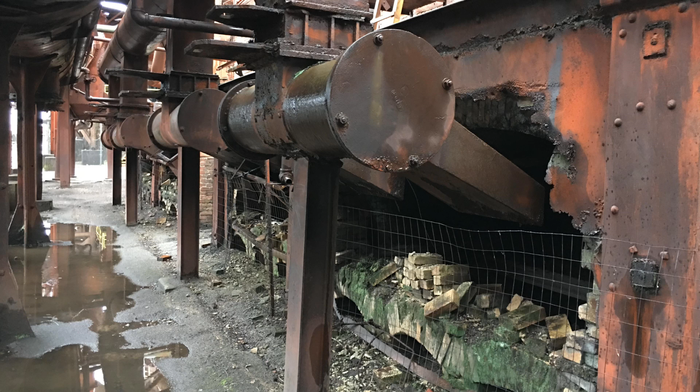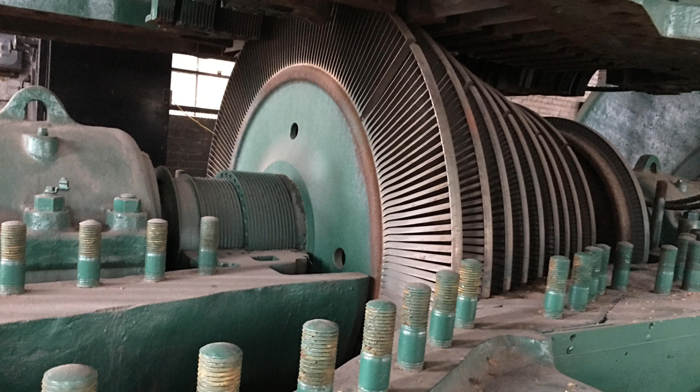I took a lot of pictures and video, trying to make a really nice video out of it. It's going to run a bit longer than normal, about 40 minutes or so, but it takes a while to get through that place, and there's some really cool stuff to see. They have the old steam engines, some late model Ingersoll Rand turbo blowers, and just about every place in there is fascinating to me. They also had the old stock tunnel, a real creepy place with water falling down and stuff. I really enjoyed it.

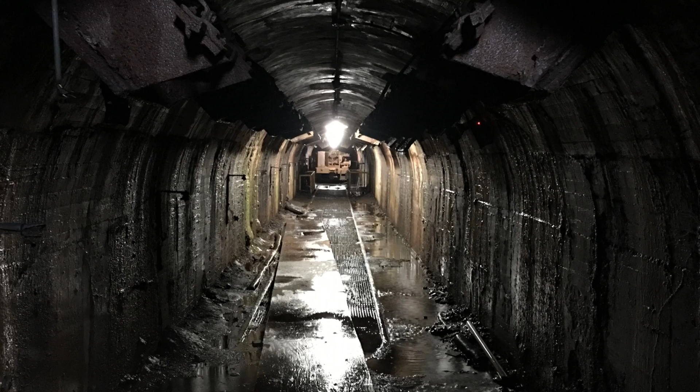I can't tell you how much I really enjoyed that. I was by myself this time, Abby wasn't able to go on this trip since she had other things going on. She really missed out, but we plan to go back and see it again when we're in Birmingham so Abby can check it out for herself.

So be on the lookout for that video, I'm really looking forward to sharing it with you.

For the machining content this week, I've got a big mix-up for you, a lot of different things going on. I'll show a little more of the G&E shaper, I replaced some screws on it and we did some more practice cuts. I've also got several different jobs from my day job at Motion, some different things we've been working on, some cylinder work, just a good mix.

I also do a follow-up on that very large gearbox I last showed on its side, with the big hollow bore gear and the vertical input shafts. My coworker Brett tries to explain what the gearbox is used for, since that's one of the things everybody's always interested in.

So that's going to be the extent of the content for this week, and I think I've got a good video for you.

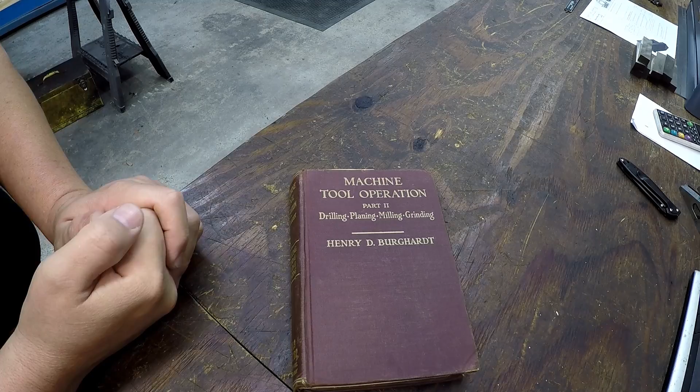I'm going to move the camera down and show you one of the reasons why he sent this book to me, because it has a section on shapers. Let me share that with you, and then we're going to jump over to our content this week. So here's our book from Arthur Nelson, let's check out what it's all about.

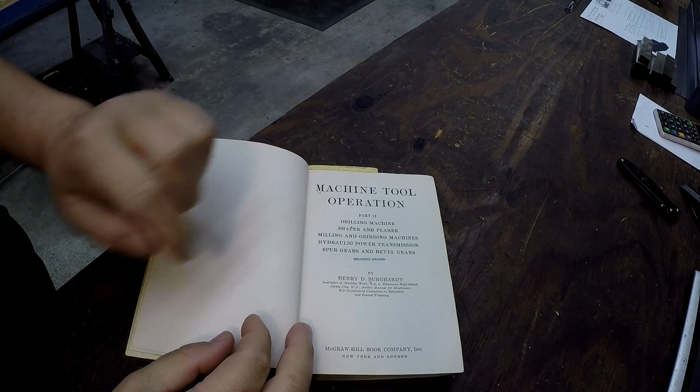Machine tool operation, part 2 - so obviously there's a part 1. We've got drilling machine, shaper, and planer, milling machine, grinding machine, hydraulic power transmission, spur gears, and bevel gears. Very cool, man.

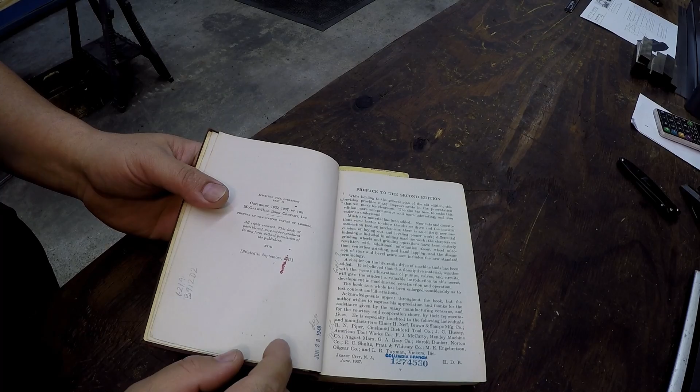This one says copyright 1922, 1937 by the McGraw-Hill Book Company, and this particular copy was printed in 1947. Lots of good stuff in this book - one of our favorite classic type books.

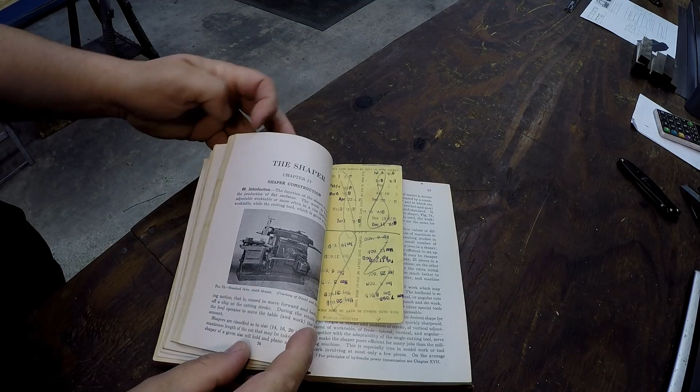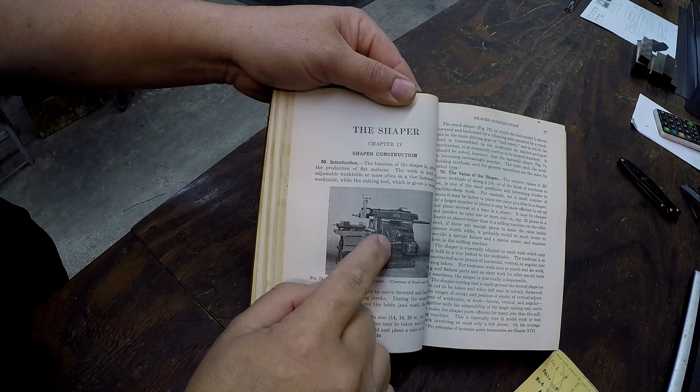We're going to go ahead and jump to the section on the shaper. Look at that - can you tell what kind of shaper that is? That's the same shaper that I have here. That's a G&E shaper, except this is your regular tool room style, the straight table. So a very good section in this book on the shaper and on the planer.

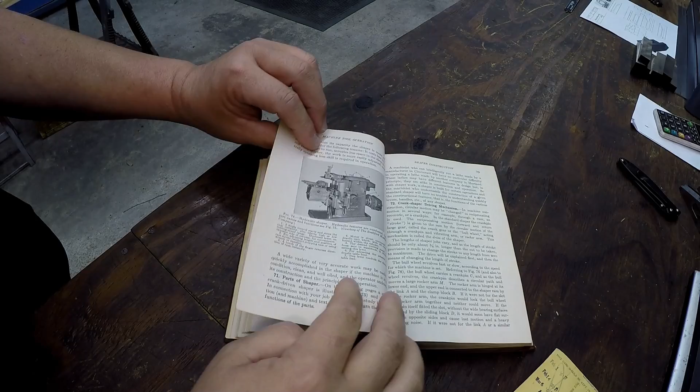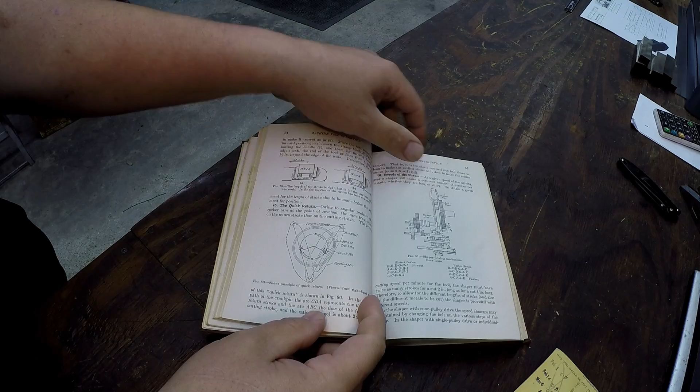It does have some other machinery they share in here as well, but it does a really good job of explaining how the shapers work. This is some of the stuff I've shared with you before - the crank, your rotation there on the crank and the bull gear. So a lot of good stuff.

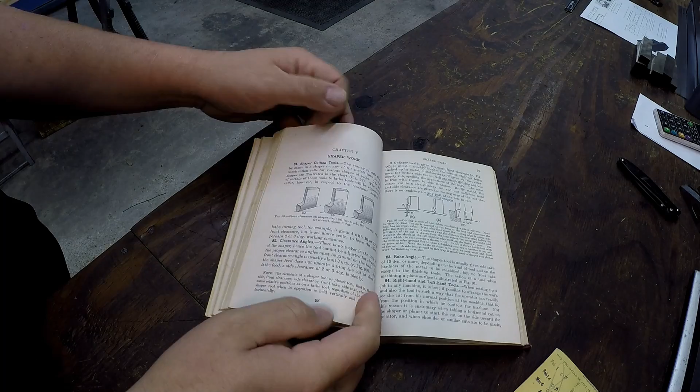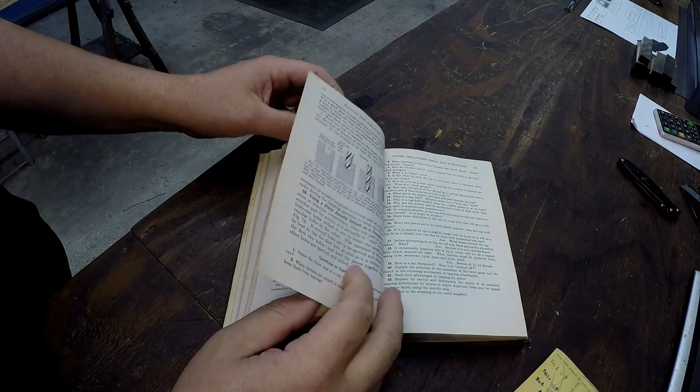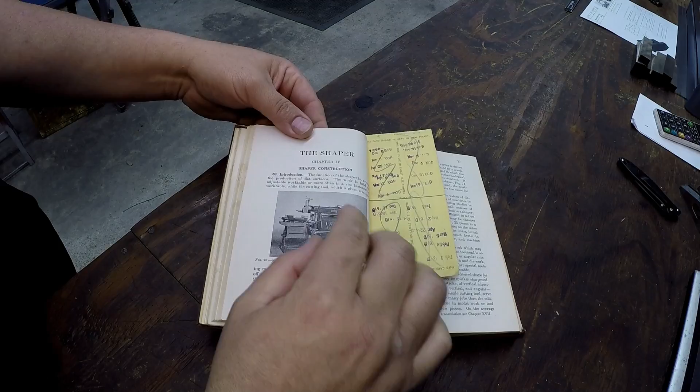It goes into the toolings as well, so I'm going to enjoy going through this book and reading it. Always fun to see the pictures in it. It even had the original library card where they punched it out, got the dates on it, and he had put it right in there on the shaper section. So Arthur, thank you very much for the book. I'm going to enjoy having this and go start reading through it. It's got some good info, especially on the tooling and setting up the proper feeds and speeds.

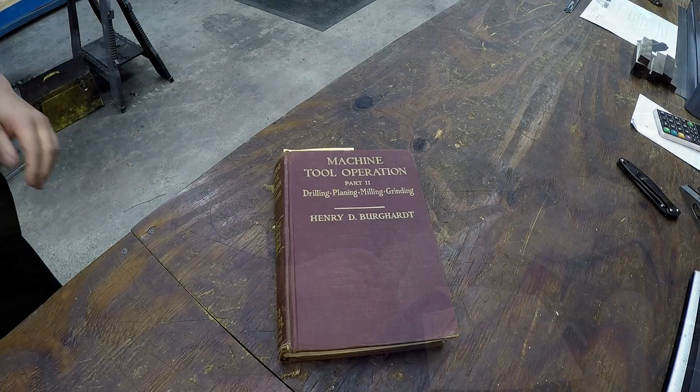Well, come on into the camera over here. I'm just out here trying to... oh, I have to be on the camera? You have to be on the camera. They probably would like to see it.

So I'm out here cutting felt, and Abby received a gift today. You received a gift from Kevin Alexander in Texas. And he wrote you a letter. This is crazy cool.

I'm sorry, I know I'm supposed to be reading this, but it's a long letter and I just want to read it myself. That's fine, that's awesome. Well, there it is - I've never really had anything quite like this. He says cap not glued. Oh wait, open this end. I can read, I can read.

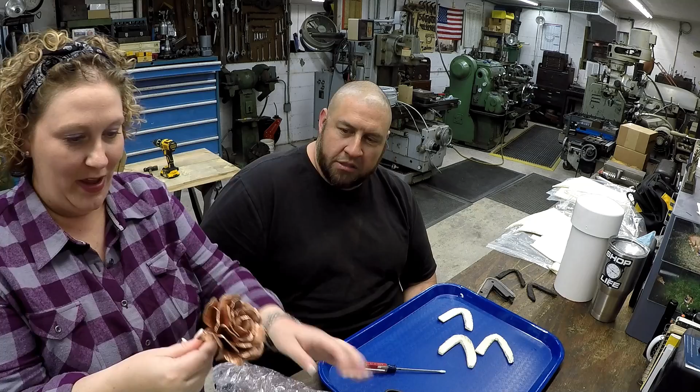Ooh, wow, look at that. Wow. Okay, I am in love with this already. Look at that. What? Okay, that is fantastic. Look at that, nice job Kevin. I'm impressed - a copper rose. Very impressed. Hey, you did a very nice job on that.

The perfect place for this. Sorry, it's not going to be where you're going to be. Well, it's a gift for you, so you can put it wherever you want. Okay good, it's going to be on my vanity with my makeup. This is amazing, this is so beautiful. Thanks Kevin, thank you so much Kevin, that's a nice gift. Thank you very much. Thanks for thinking of Abby. And I would have to agree - I'm very glad that I met her, and she's been a very wonderful person to be in my life. Well, I have had fun. Everyone you know is wonderful, so I feel very lucky - good group of guys out there. You're wonderful too, oh thank you, this is beautiful Kevin, thank you so much, I will truly, truly treasure it.

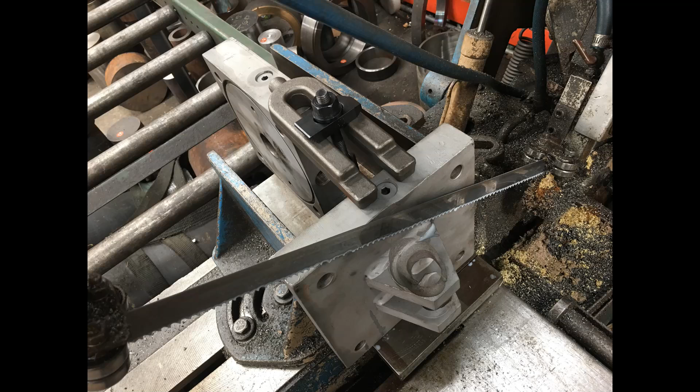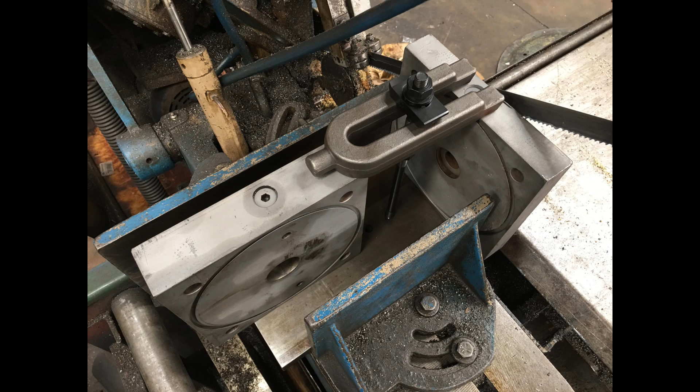That is amazing. So for this job, I have a base plate off of a pneumatic cylinder, and the mounting lugs on it have been severely worn and need to be replaced. So what I'm doing is setting it up in the bandsaw in the Kalamazoo. I've got a plate that I made that's got some tapped holes, and what I can do is clamp that plate in the vise and then use some standard hold downs to hold plates like that to easily cut them off.

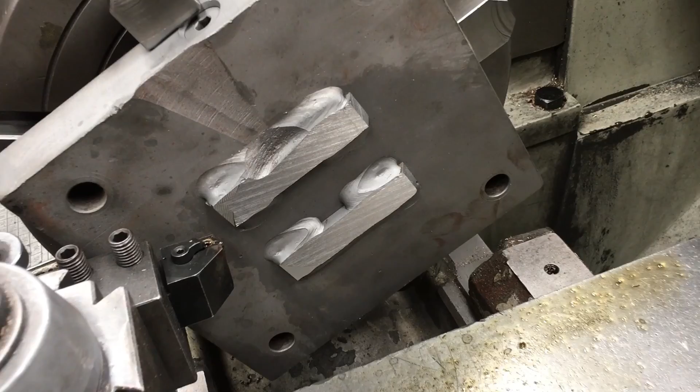After you bandsaw cut those ears off, you can just set it up in the 4-jaw chuck and face the rest of it off there.

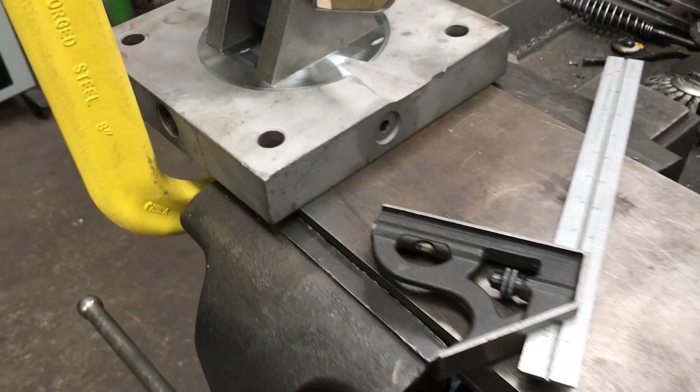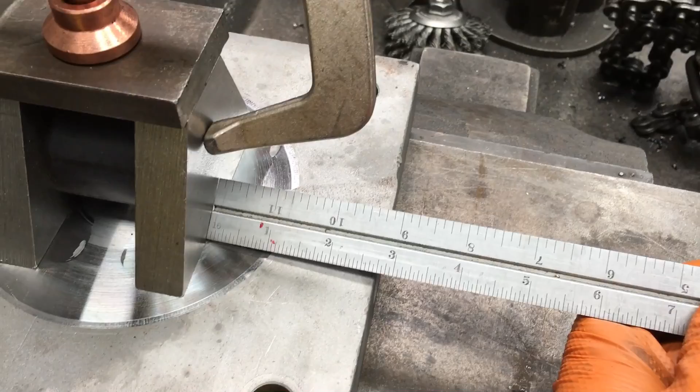All right, so after we machine the rest of the ears off there, we got her set up here to weld it. We got it centered, and used a combination square to square it up and center it both ways. Got her clamped down, and we'll get her welded in.

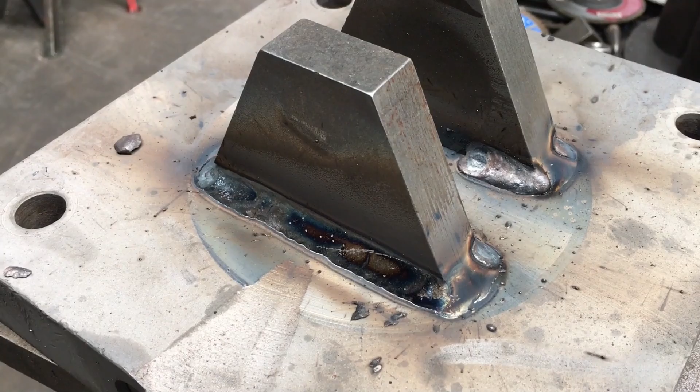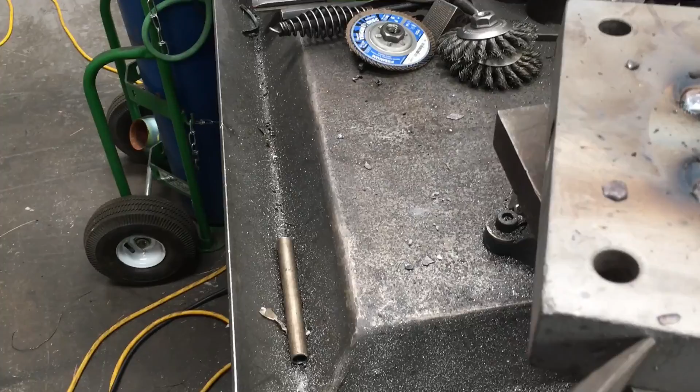Alright, we got her welded in. I used the flux core, or dual shield, on the Millermatic 251. Always does a good job. Flux just comes right on off.

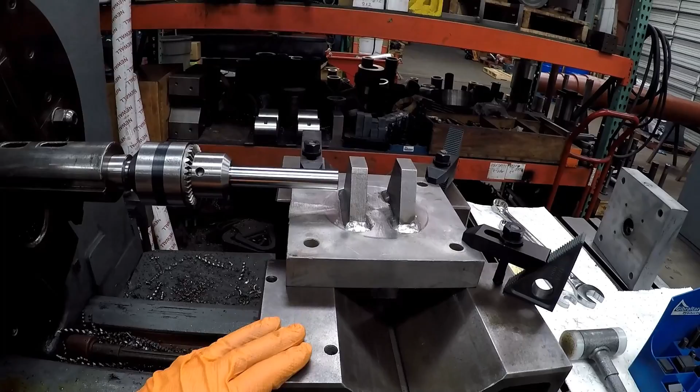Let that cool, and we'll set it up and get it drilled and reamed. You guys ever use the top of your V-blocks to hold stuff on? These sometimes work out good for jobs like this.

So we're going to do our drilling and reaming right here in the horizontal mill. I like it here because it's a bigger machine, and it's just much easier than setting it up in the vertical mill. So the hole is centered this way, and then it's 1.5 inches from this face there.

A real simple way that I do it: I've got a piece of 1-inch bar stock right there. I bring it down till it rubs, and then bring it up half the distance, which would be half an inch. So then we got to drill it and ream it for 1 inch as well.

First thing I did was center drill it. I'm gonna run in here with a smaller pilot drill. I always like to pilot with a smaller drill.

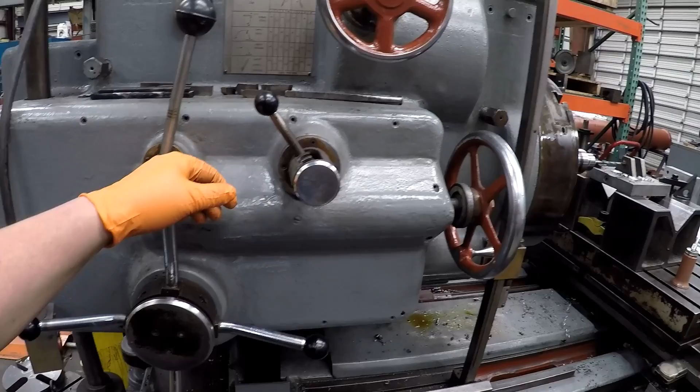This is the power feed, so you pull it out to disengage, push it in to engage. I do that to try to break the chip some. Sometimes I'm not fast enough.

When we come through the other side, just start it real easy. I'm not power feeding, I'm just applying a little pressure on the quill handle. Let it self-center, and then let the hole start.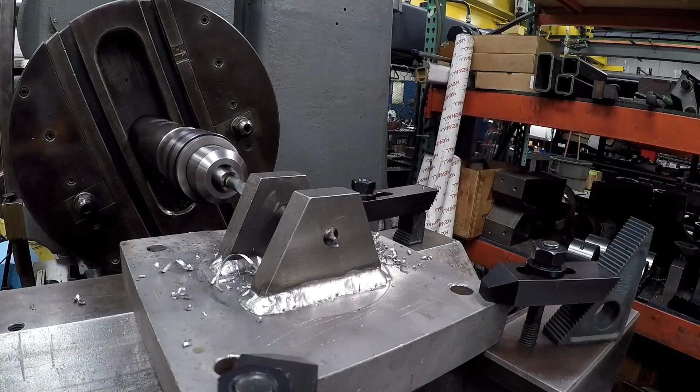Using a 31/32 taper shank drill bit. After drilling that, it should give us 25 to 30 thousandths to ream the hole.

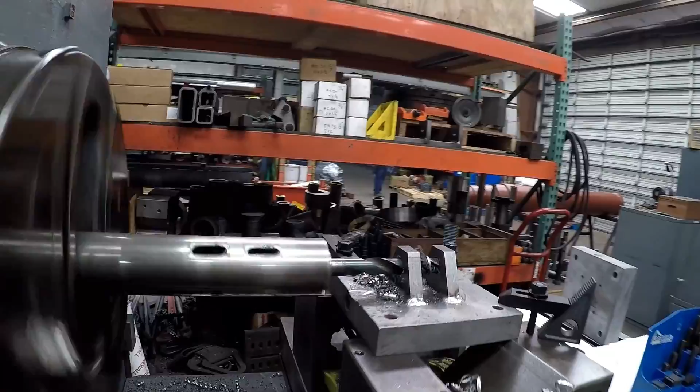We got our 1-inch reamer, lowered our speed, kicked up our feed. Gonna let that run through there. Good idea to keep your reamer oiled or lubricated.

Good looking holes. All we've got to do is just do some deburring and that'll be ready.

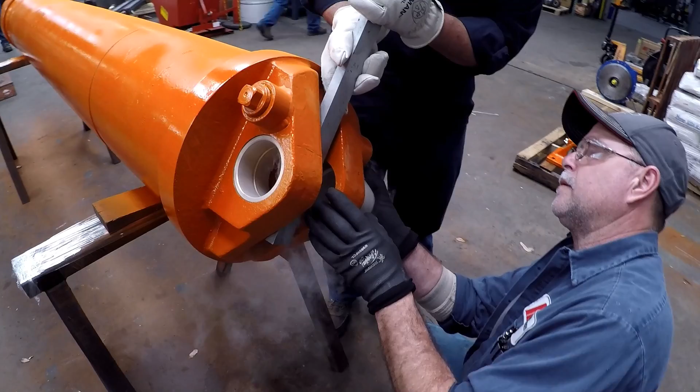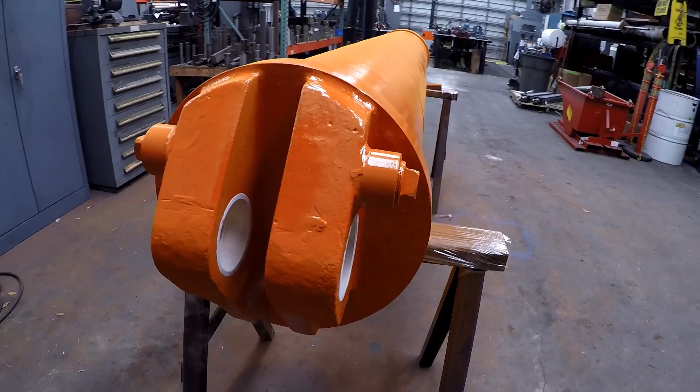Hey, are they gonna hold? No, we're in trouble. You want me to move those wedges so that we can rotate that thing? That's good. Just that one wedge is holding it. You want me to move it? You can, we'll try, roll it just a little bit. There you go, all right, I got that wedge on that side there. Are they tight yet? Yeah, let me see. Okay, yeah. All right, so I did good on my measurements then. They shrunk down and then they grew. They're tight in the hole.

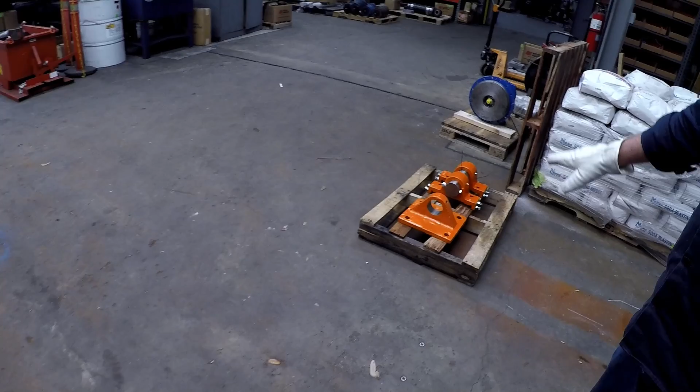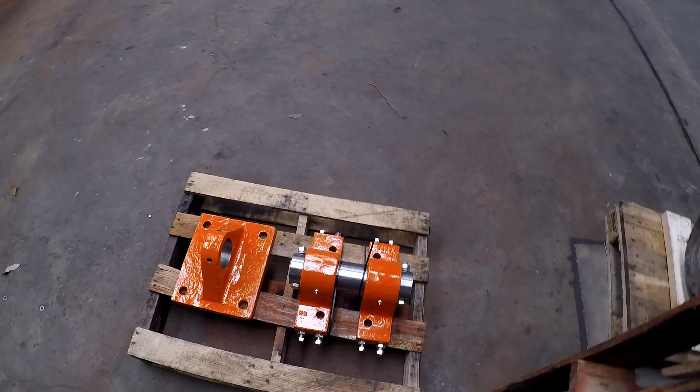All right, so all we got left here is to install the pins, and that's the ship-it set. That's the mounting plate that goes here on the bottom, and then you have that one right here that goes on the top side, the top eye there. And that's all we got left is to install those, and this telescope will be done.

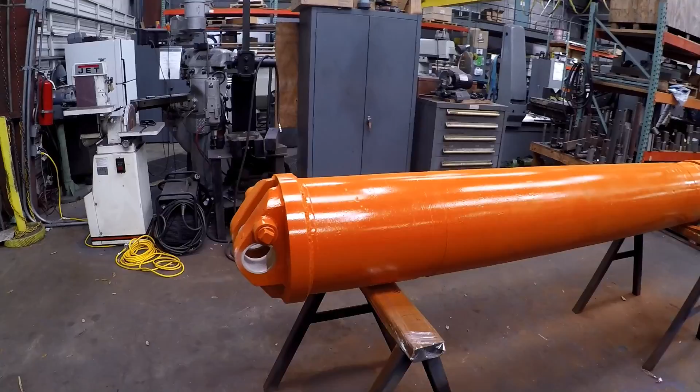You saw me do the welding on the tubes for this, and then we had to do a little bit of the bronze work on this. That one's about ready to go. These are for truck dumps, used usually at paper mills, wood mills, things like that.

All right, we got the new pin installed and the mounting plate mounted in there, and everything fit good. It was a really good close fit on them bushings there. Worked out really well. So this one is now 100% done and ready to ship out of here.

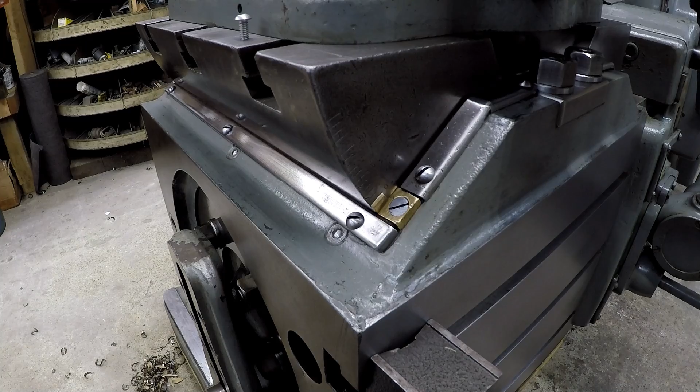Well, I finally got my button head screws in from McMaster Carr. I finally placed the order anyway. So these are the screws that are going to replace the slotted head screws here for the wiper holders. That's one of them right there.

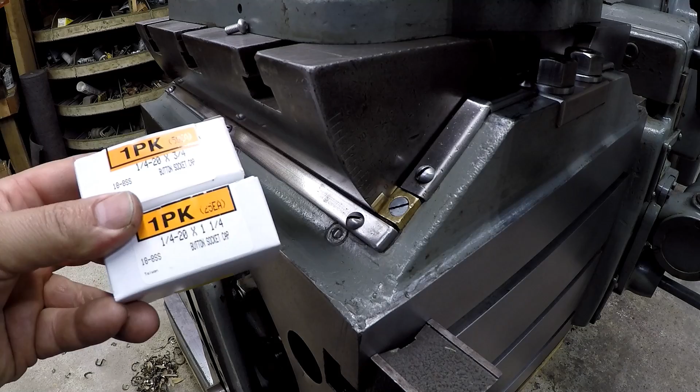And I ordered 3 different lengths. They come in boxes of 50 for this particular size right there, but it was like $5 a box, maybe something like that. So I'm going to go ahead and replace all these and spiffy this up just a little bit more. But the other 2 sizes were for the other wipers whenever I get to those, and also the wipers up on the ram.

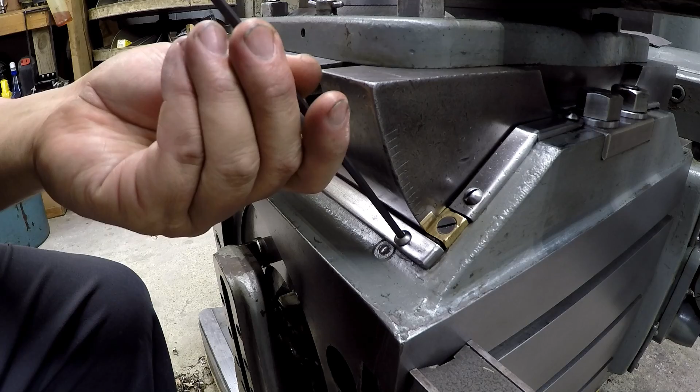All right, out with the old and in with these. I did try to find the slotted screws, but they did not offer those at McMaster Carr, so I just got these instead. Perfect.

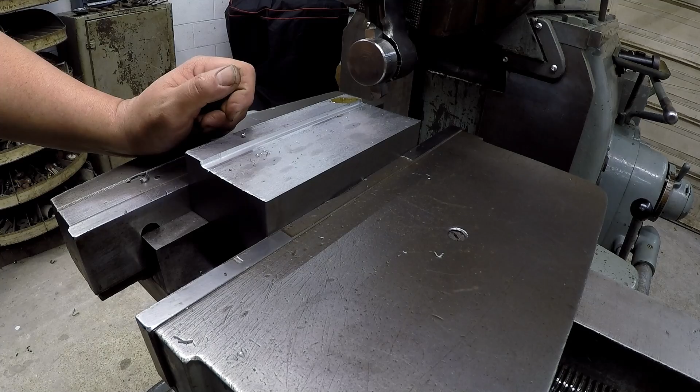I adjusted the grind on that tool bit there. I gave it some more side rake, I gave it back rake, and a little bit more side clearance underneath the cutting edge. And this is still a 1/8 depth of cut that I was going across earlier, so just going to see how the tool reacts.

Doing better than it did last time.

I increased the strokes per minute up to 34. See how it looks. I think that's still under what we should be at though.

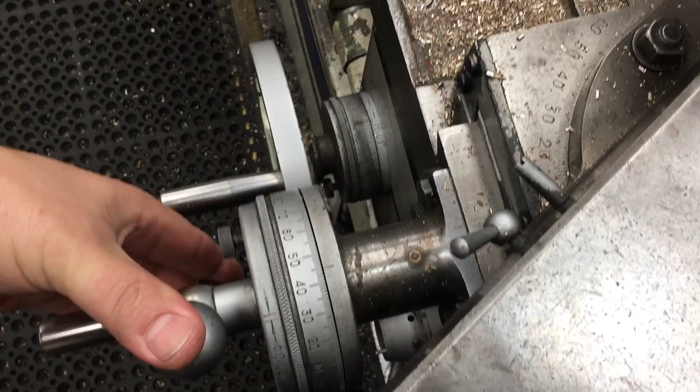What we're going to do here is create a little groove, this is for grease. Use the round nose tool, just feed in by hand. Go about 100 thousandths deep. It's not critical, it's just a groove for grease. I'm going to move it to each side to widen it out.

I'm watching the digital readout. I'm just going to go 100 thousandths to each side of zero. And then I've got one on the inside that I used the boring bar to do. Alright, we're going to use my stick to catch that thing.

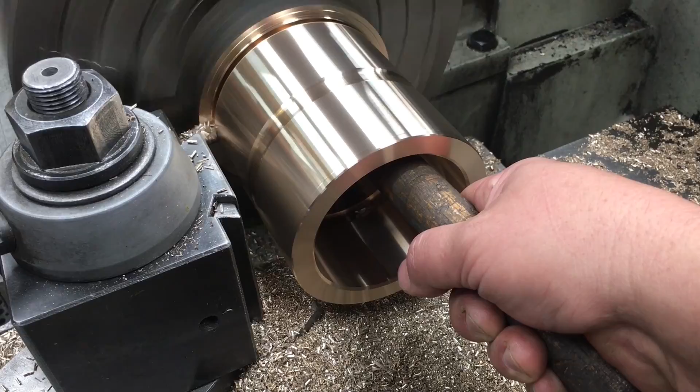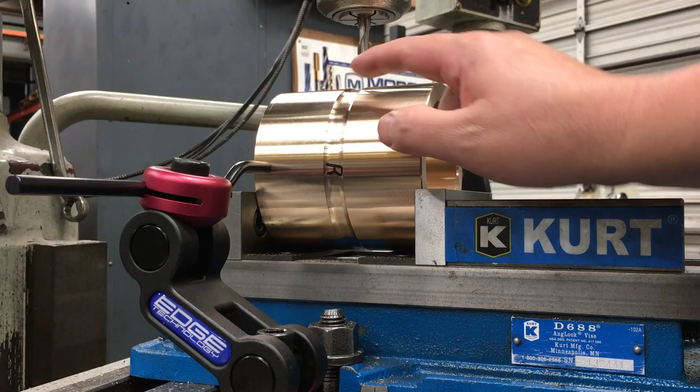So once we get them both machined, I'll bring it over here to the mill, and we've got to put a couple holes through the groove here to allow the grease to transfer to the center of it. I have two that I'm doing, so I set up a stop, and once I set the stop up, I'll find the center. That way I can just throw the other one in there, and you could easily rotate this 180 degrees and do the other side. Now the location of the holes aren't that critical because it's just for grease to come through.

We'll do one. Alright, once we do one hole, I'm just going to rotate it 180 degrees, just by sight. It's not that critical, and I got that hole in the bottom there, pushed over against the stop. Looks good. Alright, we're going to go ahead and do it.

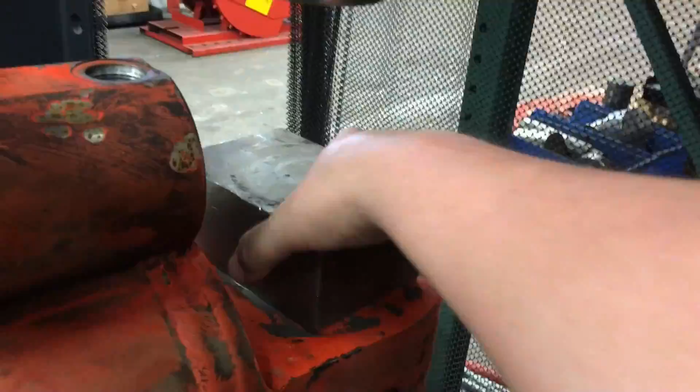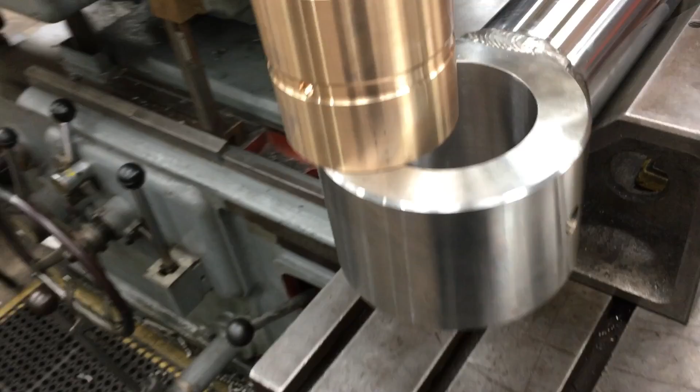So here's the second bushing, made it for the new rod and eye here. And here's something I'll point out. On the very end of that I usually turn just a little step, just a few thou undersize, just to help start the bushing. I'll try to show you this, but I can't really do it one-handed. There it goes.

So that allows you to start a bushing nice and straight. It'll go in there nice and straight. So we'll make sure that the holes are nice and aligned top to bottom there, and then we'll go press it in.

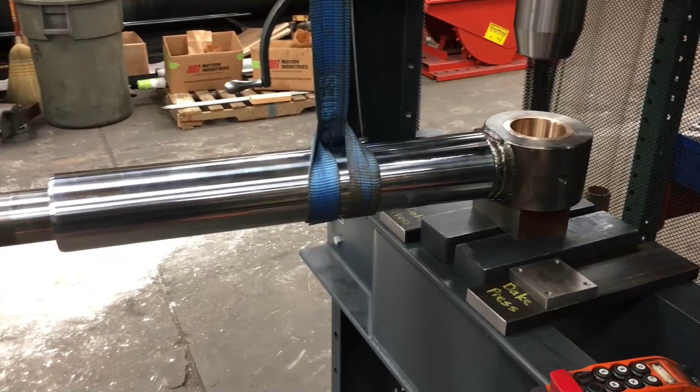Alright, so that's all for this one. That's a grapple cylinder. We got our new bushing on that end, and then we got our new rod. So this one is ready to build. It does need to be cleaned and honed though, but the machine work is done anyway.

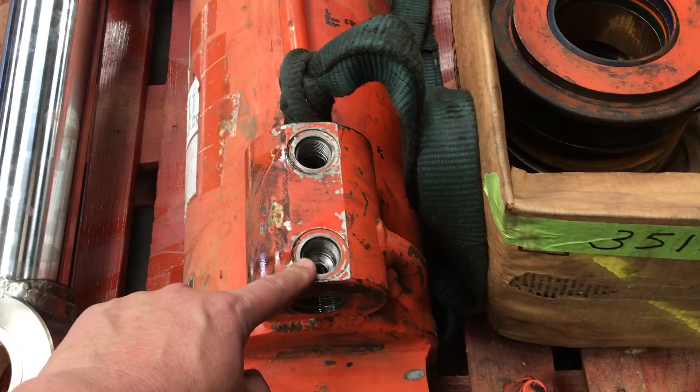I had some guys asking about these blocks on that other one I was building, and what this is: you have one hose that's going to go there, and that's to put oil on that end of the piston to retract it. Your other hose is going to go here, but what you have on the end there is a counterbalance valve. That's what goes in right here and screws in, and that is a safety precaution in case this thing loses pressure on one of the lines. It will actually hold pressure so that it will not release its load, because these are used for picking up trees. So that's what that is.

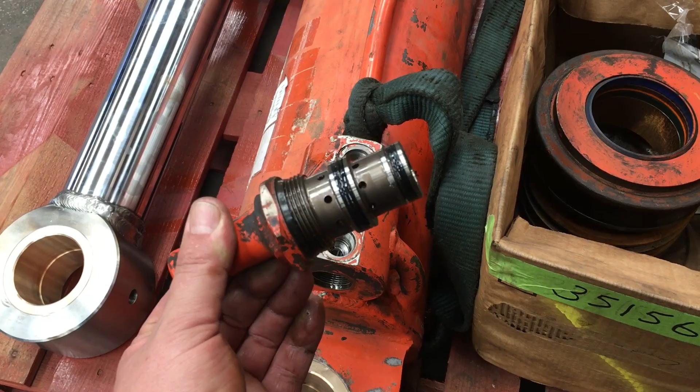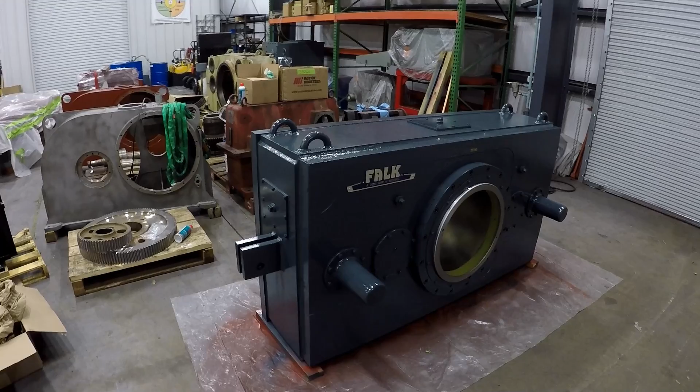The guys got the big gearbox finished up, and it looks great, beautiful. It looks like something brand factory new. And you can see it's a Falk, and this is a custom gearbox made to order, and it looked good.

So what does this gearbox do? What is it used for? Everybody wants to know where this goes and what it is used for. On a tissue machine, this drives the last roll on the machine. They actually pump hot steam inside the roll, and as the tissue paper goes over this roll, it makes the water evaporate, basically drying it right before they cut it up into little bitty rolls. It's a huge roll of paper. So this is like a shaft mount, it mounts on the actual shaft of the dryer drum, and this gearbox drives it.

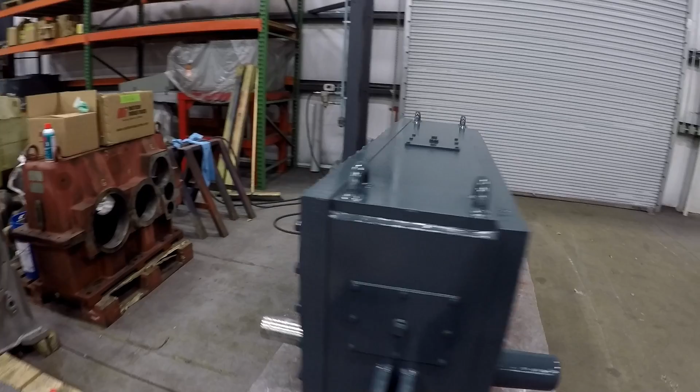Do you know what kind of power runs this? It has two 400 horsepower motors that drive it. 800 horsepower total on the inputs, and that's back here on these, right? Yeah, your electric motors are going to run these shafts here, they mount side by side. Well, there you go, that's what that box does. It helps make toilet tissue, or tissue paper in general.

It looks good. They did a good job on the build on this one here.